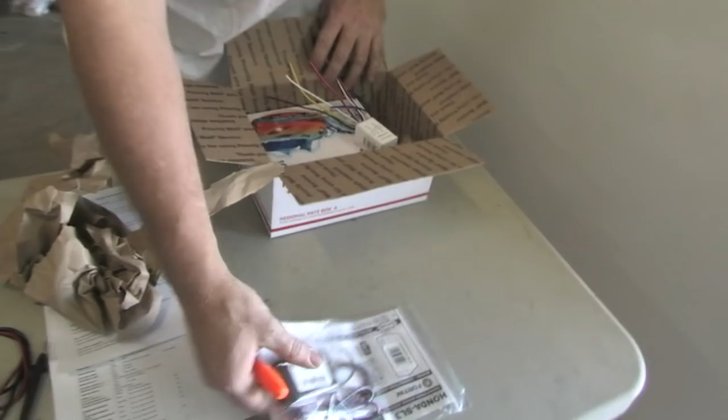Here's an example of the basic tools you may need for your installation. Unpack your components: the brain, the remote controls, and the wiring harnesses.

The first step of the installation is to prepare the harnesses. It's easier to do this on your workbench than when you're inside the vehicle. A lot of the wires that you see in the box will not be needed. Here's where you refer to your tip sheet. It will tell you which wires you'll be using and which wires you won't be using. Separate off the wires that you won't be using.

Next, plug in your LED, the antenna wire, the valet switch, and the door lock harness plug. Note that on CrimeStopper remote starts there are two 3-pin plugs. The correct plug for the door locks is the one with the white connector.

Now that everything's plugged into the brain, tape up the harnesses so that everything is nice and neat. The wires we're not using are still separated, and I'm going to leave them out of the bundle. Make sure your fuses remain accessible.

The next step is to prep the bypass harness. In almost all installations, only a fraction of the wires in the bypass harness are used. Refer to your tip sheet. It will show you which wires to use and which ones to trim. In this installation, we're only using 3 wires out of the main harness. That's not uncommon. Now that the prep work is done, it's time to get access to the wires in the vehicle.

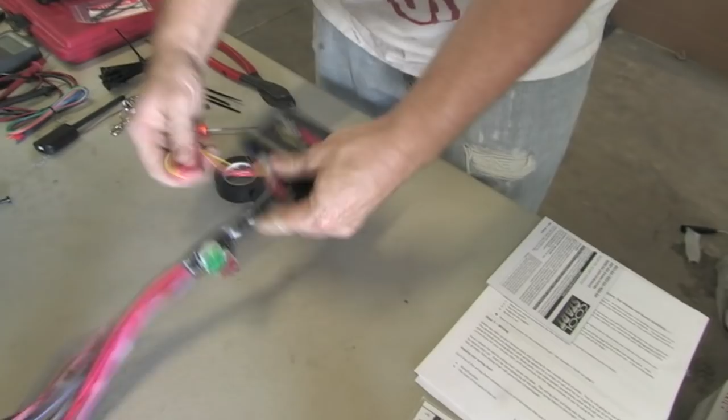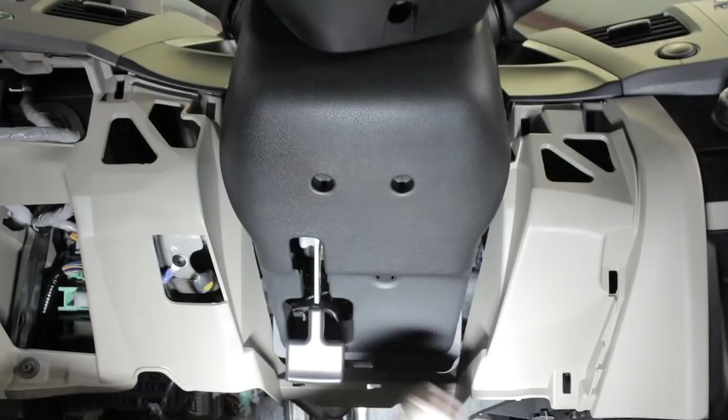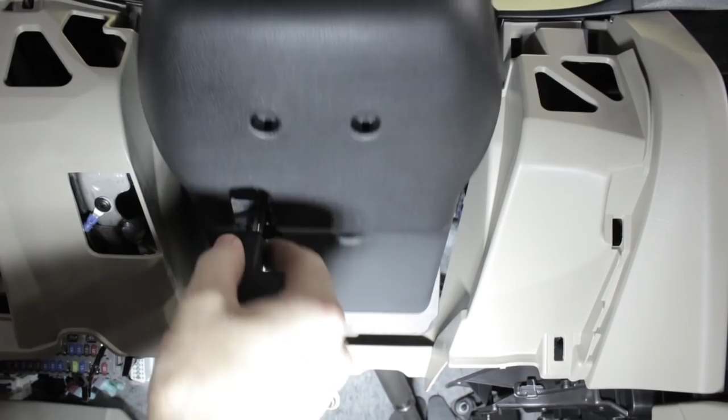In most vehicles, the majority of your wiring will be done in the area underneath the steering column. Most vehicles will have a combination of clips and screws that hold the lower dash panel into place. Remove the screws, and when removing the clips, be sure to pull gently so as to not break the panels. Sometimes screws are hidden, so be sure to check carefully before pulling on the panels. Some installations will also require removal of the steering column cover.

In most vehicles, your main power connections will be made at the ignition switch harness. This includes the main power input, the starter wire, the ignition wire, and the accessory wires. Your vehicle wiring chart will identify the colors of those wires, but you should always verify them using a voltmeter.

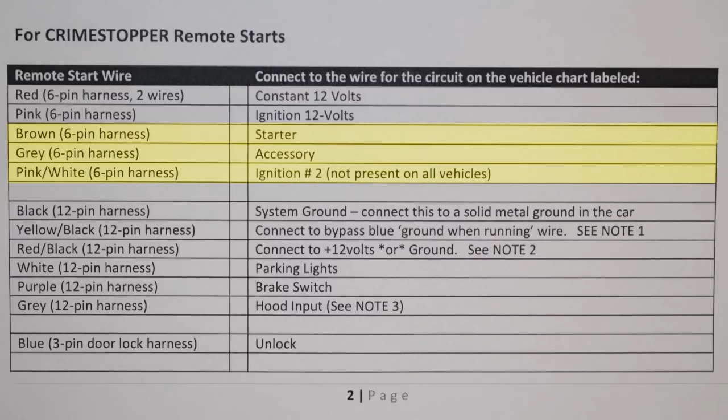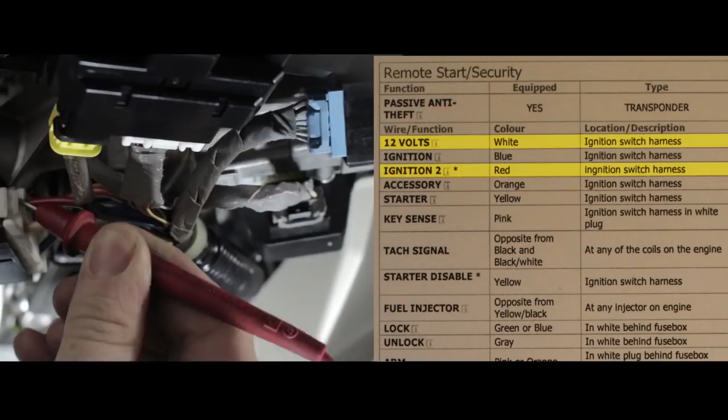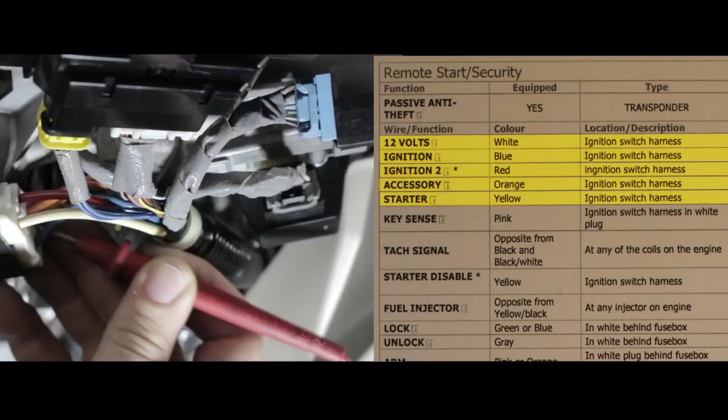Here's a great example of how to use the wiring chart in your tip sheet. The wiring chart for this vehicle tells us that the main 12-volt wire is white, the second ignition wire is red, the accessory wire is orange, the ignition wire is blue, the starter wire is yellow, and that they're all located in the ignition switch harness. We've located the ignition switch harness, we've located those wires, and now we'll just test and verify them.

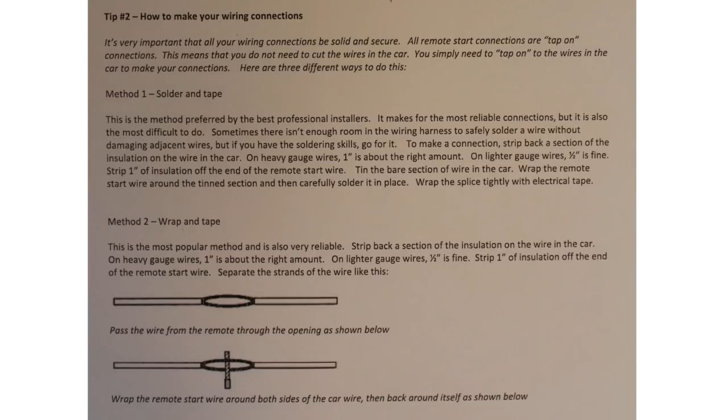The best way to make wiring connections in a vehicle is to solder and tape, but that's not always feasible. We've provided T-taps with your kit, which allow the do-it-yourself installer to make reliable connections.

Put a T-tap onto each of the wires that you'll be using. Refer to your tip sheet to see which ones they are. Use a pair of pliers to pinch them until the locking tab engages. Make sure the T-tap is secure.

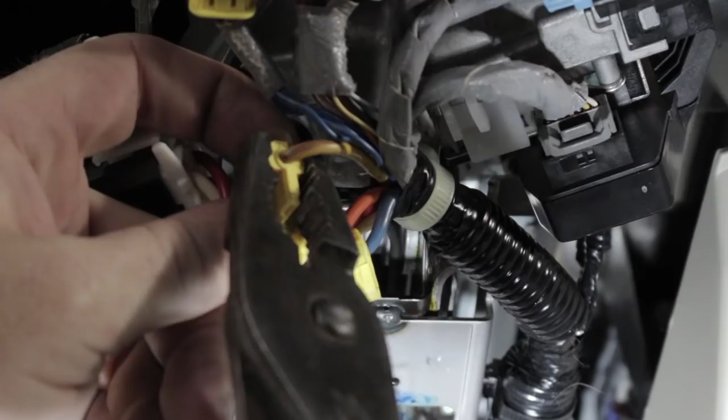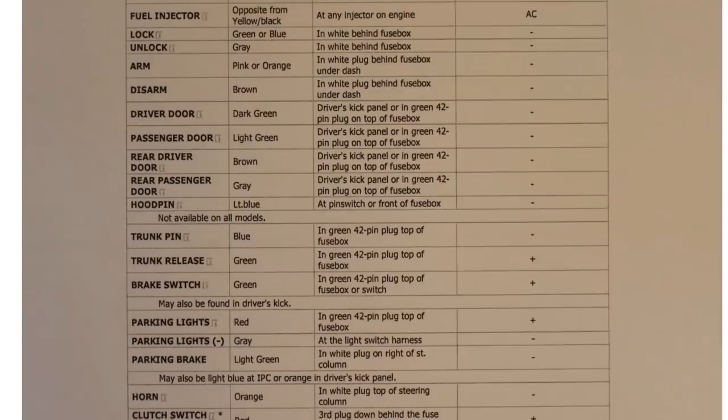Now that we've put taps on all of the wires we'll be using in the ignition harness, we'll locate the rest of the wires we'll need for the installation. For remote starts with keyless entry, the door lock wires are typically located in the kick panel. Refer to your wiring chart for the exact location and colors. In this vehicle, the door lock wires are blue and pink.

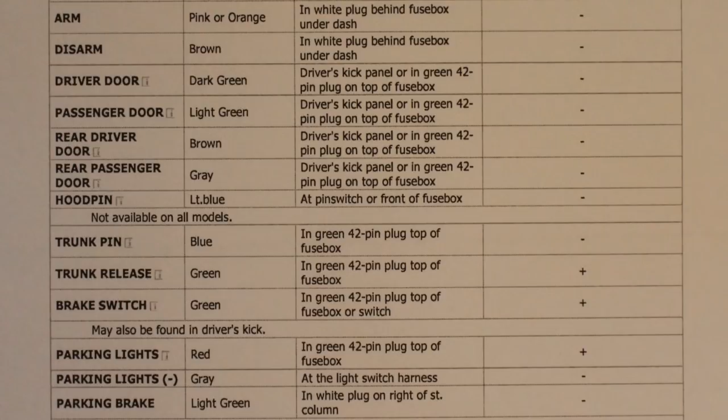We're also going to put a tap on the brown wire, which is the OEM alarm disarm wire. This will automatically disarm your factory alarm when you engage the remote start. We've also used our wiring chart to identify the brake wire and the parking light wire, and we've put T-taps on them too. Next, we want to plan on where we're going to stow the remote start brain.

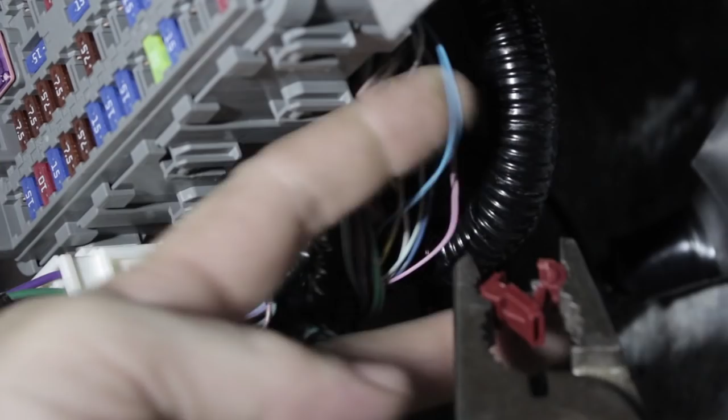Then we'll measure and trim our wires accordingly. Once the wires are all trimmed to length, we'll attach the male spade connectors that are going to plug into all the T-taps we've installed. Use your tip sheet to match the wires from the remote start to the correct color wires in the vehicle.

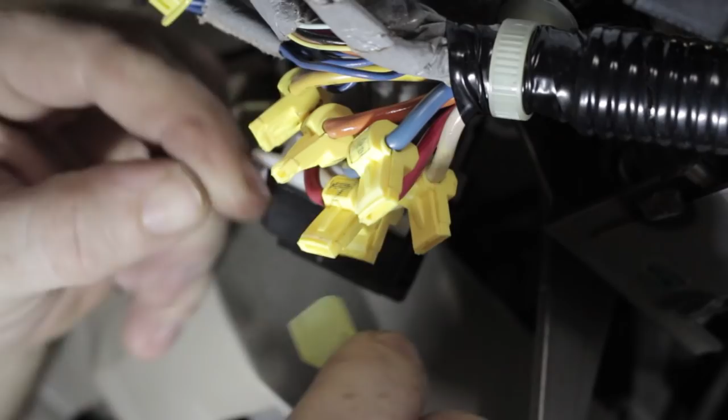Once the main ignition harness connections have been made, make the rest of the connections as called out on your tip sheet.

Now that all the remote start connections are complete, the next step is to make the bypass connections. The bypass is what allows you to remote start your car without having to leave a key in the vehicle.

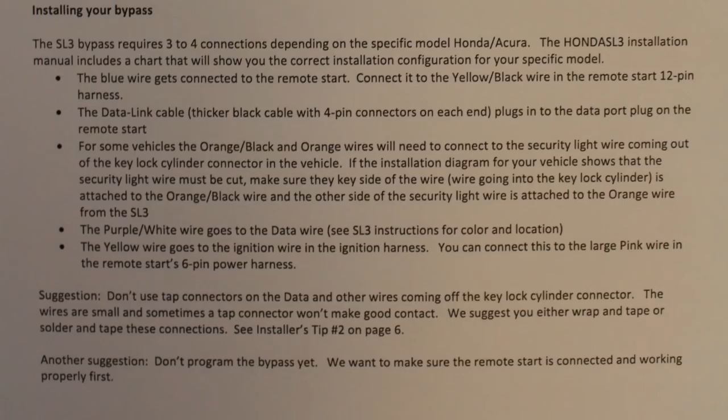Again, specific vehicles will vary, but the transponder plug is usually found in the general vicinity of the key cylinder. Your tip sheet will provide you with this information too. Make the bypass connections according to the instructions on your tip sheet.

When doing bypass connections, don't use the T-taps. A direct wire-to-wire connection is required. Soldering is the best method, but wrap and tape is also acceptable. Your tip sheet contains instructions and diagrams on how to properly wrap and tape wires.

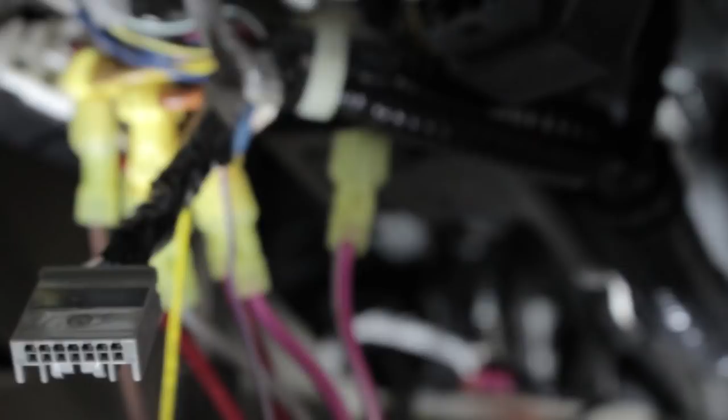Once all of your bypass connections are made, tape up the transponder harness and plug it back in. Now we'll make the rest of our connections.

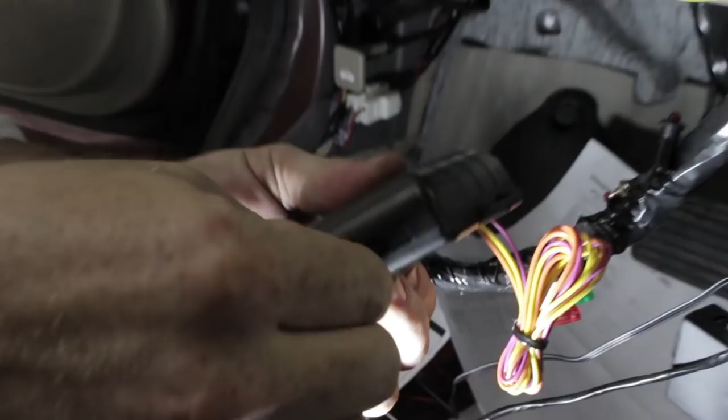Many bypasses have a data link plug that directly connects the bypass to the remote start. We'll also connect the remaining wires that need to go into the car: the parking light wire, the brake wire. Our tip sheet tells us which wires in the car to connect to.

If your remote start comes with its own remotes, you'll need to run the wire for the antenna. Pull down the trim gasket that holds the headliner in place and tuck the antenna wire underneath.

Before mounting the antenna, we'll test the system to make sure everything is functional. When we press the start button on the remote fob, the ignition will turn on, you'll see your dash lights come on, and then the car will start.

Once all the functions of the system have been tested, find a good location to stow the remote start brain. You'll want to find someplace where the wires don't get in the way of the steering column, the brake pedals, or any other moving parts.

Stow the brain. Gather all your wires and bundle them either using electrical tape or zip ties. Secure the wires so they can't move once the vehicle is reassembled. Test the system one more time.